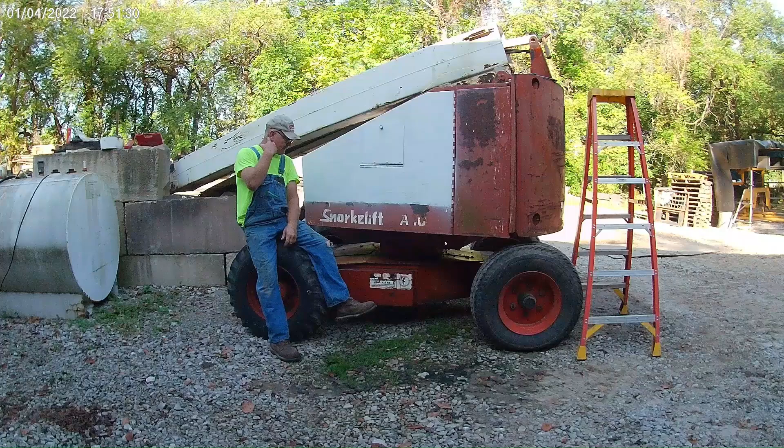We've got two problems with it. The cylinder that's inside of this boom that extends in and out is leaking oil, and the one on the end that tips the basket is leaking oil.

There's 3 sections of boom, 2 of them that scope out of the third one, and it has extend and retract cables that have to come out, and the first and the second boom have to come out of the third boom to get to the cylinder, to get it out of there and get it apart.

So the first thing we did was we took the basket off, because we don't want to have to deal with all the weight of the basket and everything else. So we took the basket off. That was the first thing we did.

Undid the wiring to the pedal. We took the dash panel completely off and set it on the ground so we didn't have to unwire anything, and then we just took the basket off.

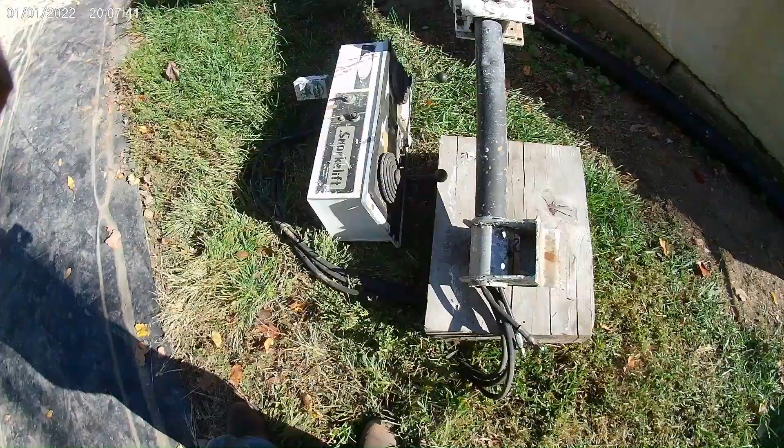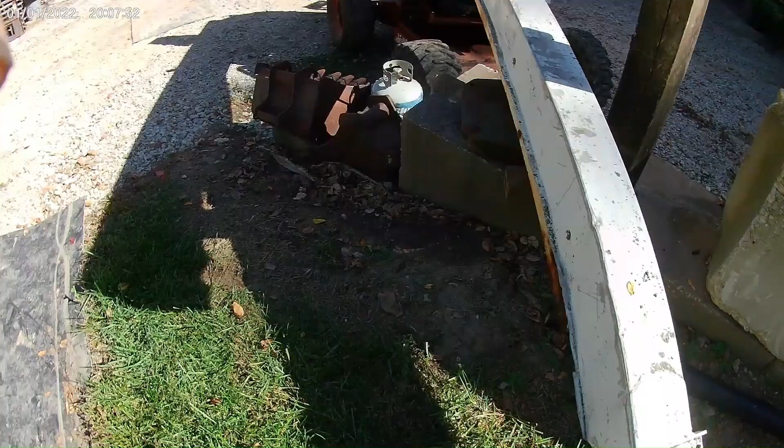So we laid the basket on the ground and we disconnected the train track from the side of the boom all the way up to the back of the boom, and just lay it off on the side of the machine so I didn't have to deal with any of that.

I think it's going to make it a lot easier with this all laying on the ground.

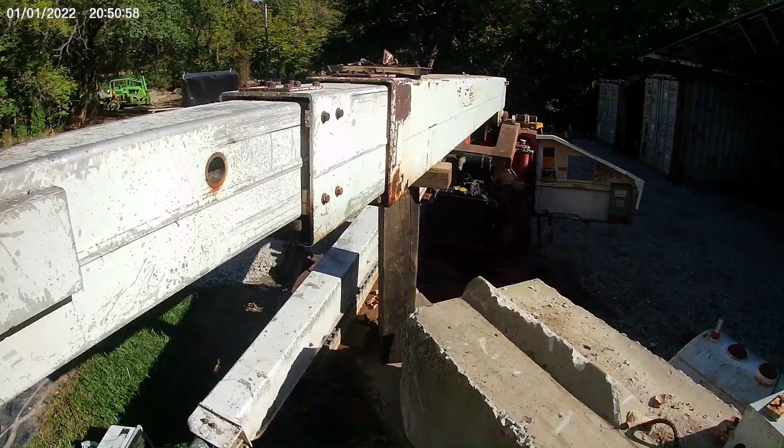So we took the butt section and we took the wear pads out and we labeled them, which one goes where. The one on the bottom, we've got all the bolts out of it.

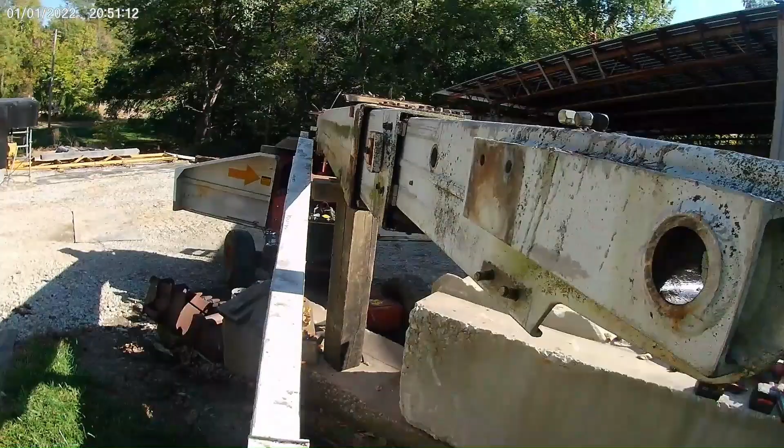And we've got the boom at a level position so we can slide this section, both sections, out at the same time.

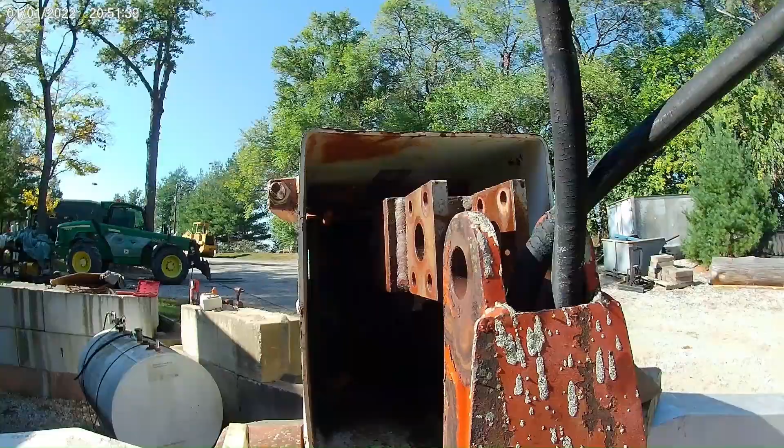So we've got our controls here laying on the ground. We've got our extend cables. We've got to take the extend cables now and take them and tie them to the cylinder on the inside.

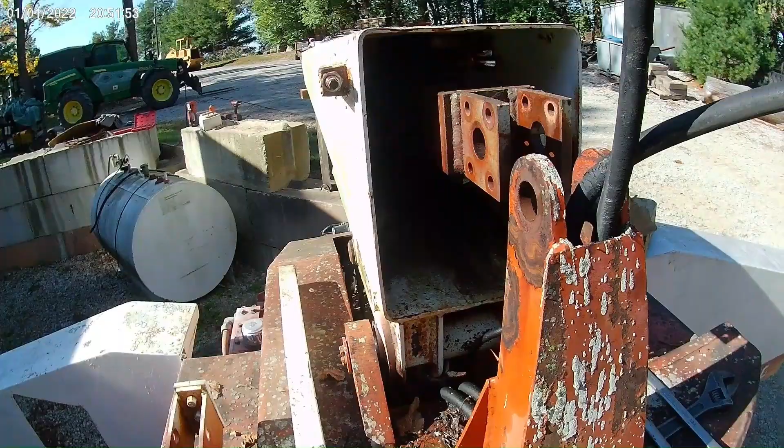We took this whole mechanism off. I thought it would just be easier to take the whole thing off. So I took the whole thing off of there, and now I'm going to go after these extend cables and get them off and tie them to the end of that cylinder, and hopefully I can just pull the whole thing out of this last section of boom. That's what I'm hoping for.

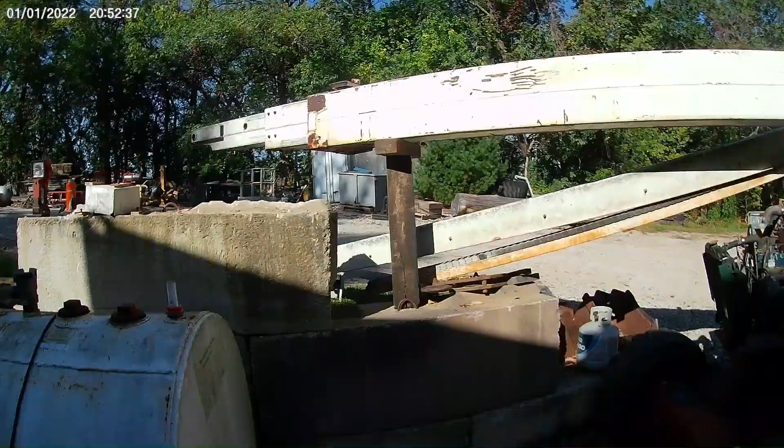Take the retract cables here and take them loose and let them hang, and as the boom comes out, the cables are going to get longer, so we'll have to pull down on these cables as the boom comes out.

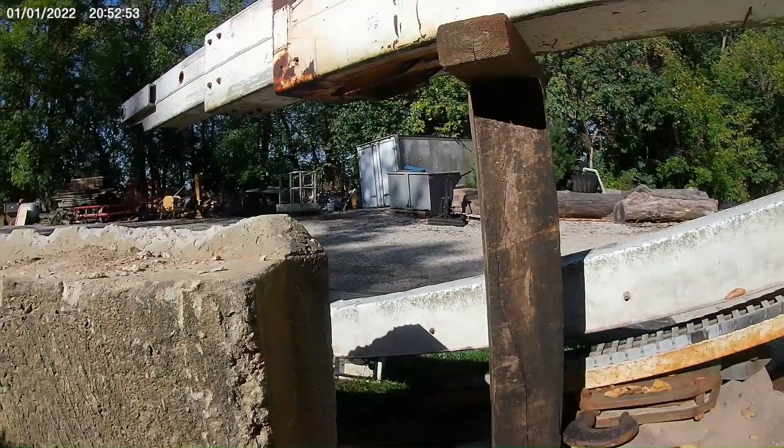So here's my retract cables. I've got them loose and hanging down, and I've put a choker right here around the boom, and I'm going to pull it out a little bit at a time. It's just me, so I'm going to have to pull it out a little bit and then pull down on these and keep those cables coming out.

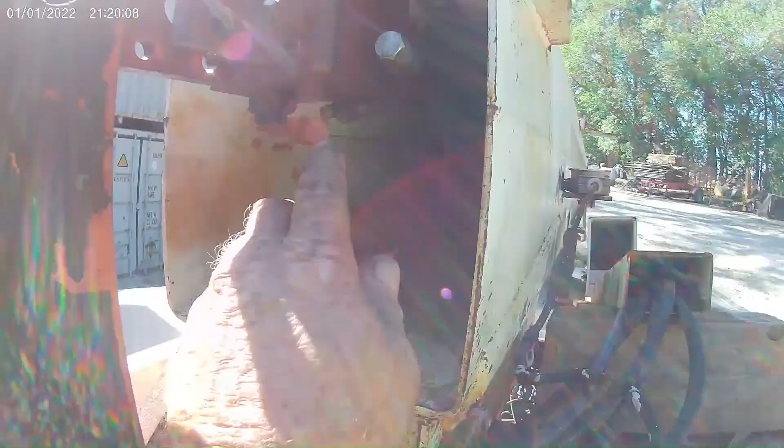And then back here in the back, the retract cables, you can see them right here. I've got them tied to the cylinder rod. So when I pull that, it's going to stay right there on that cylinder rod. I got 4 tie straps around there holding it, so surely if a couple of them break even, the other ones will hold it.

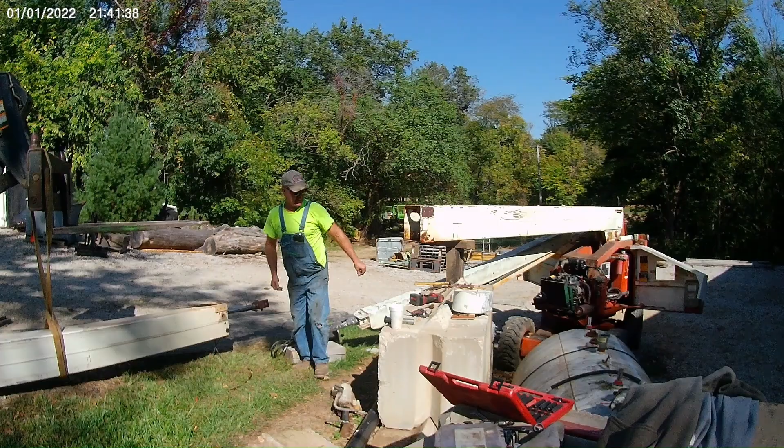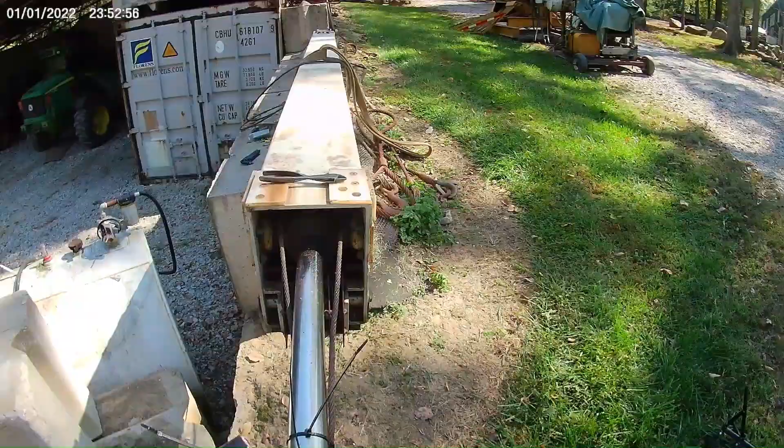So now that we've got the boom out of the thing, cut these ties off, and I'm going to try to remove the head gland and pull the rod out right here and just leave the rest of it in there if I can. That's what I'm going to try to do.

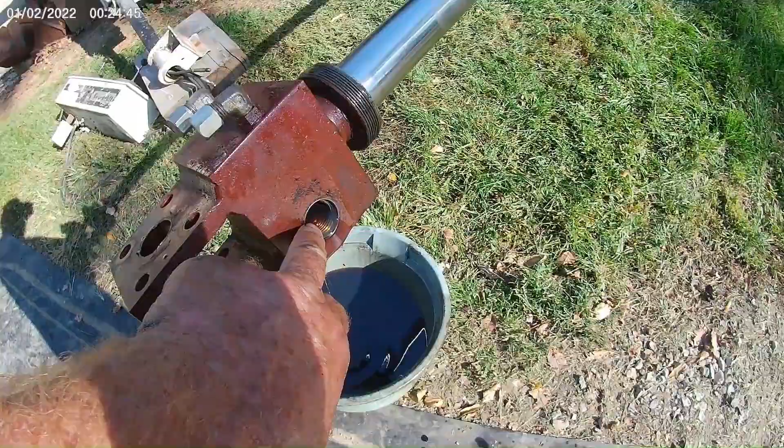So there's two load hold valves. One goes on this side, one goes on this side. This is what they look like right here.

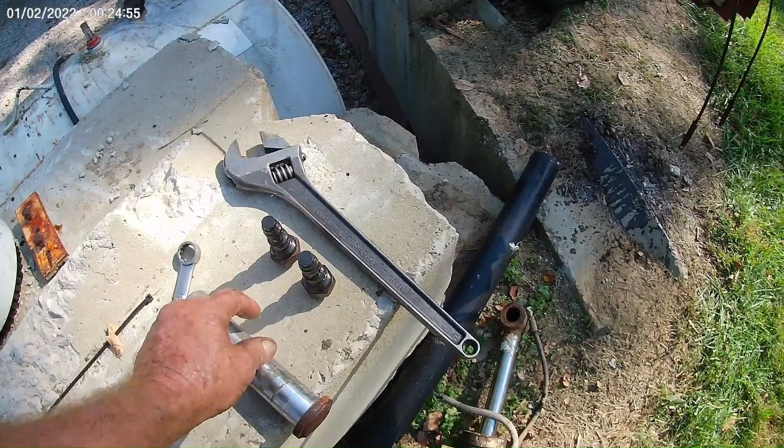You got to take the load hold valves out before you try to move the cylinder, otherwise it won't move.

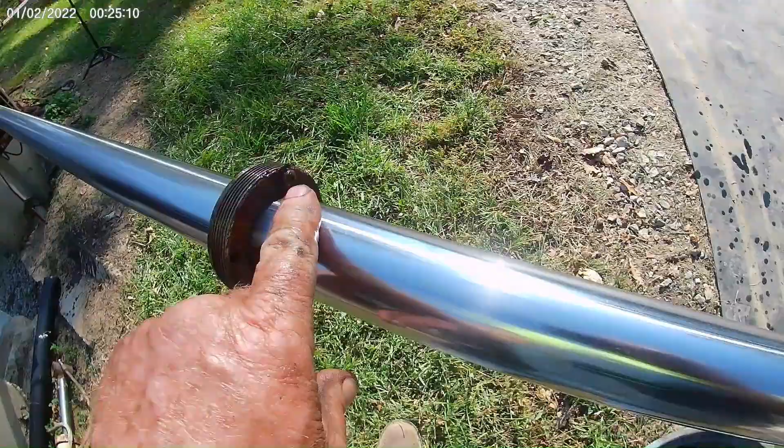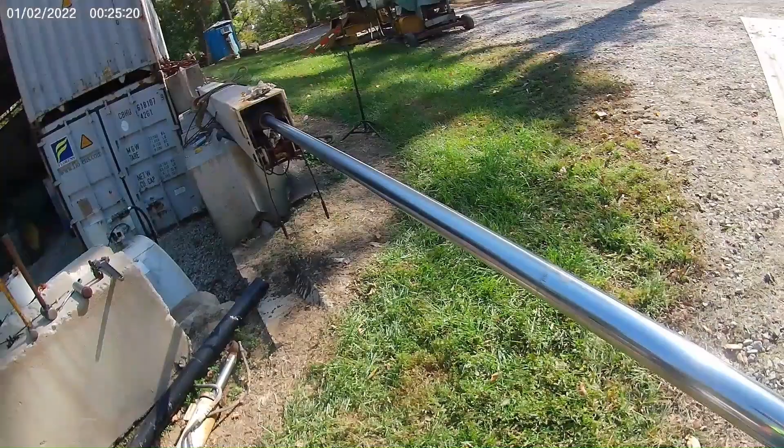Holding the head gland in here was a little set screw. Took it out. Head gland came off pretty easy. I'm draining the oil out of it now. I give her a little slight tug and it's getting ready to knock the packing right out of the front of it. So once I get it out, I'll take it and lay it up on top of this boom here where I can work on it.

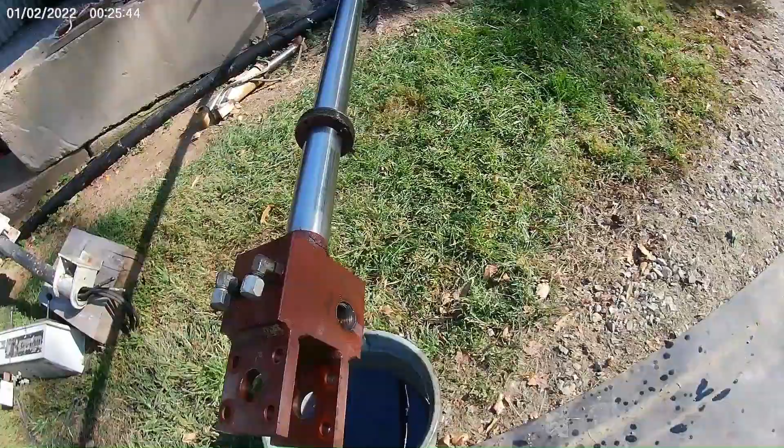Interesting way that they built this cylinder where all the oil comes in the head end of it. Pretty interesting.

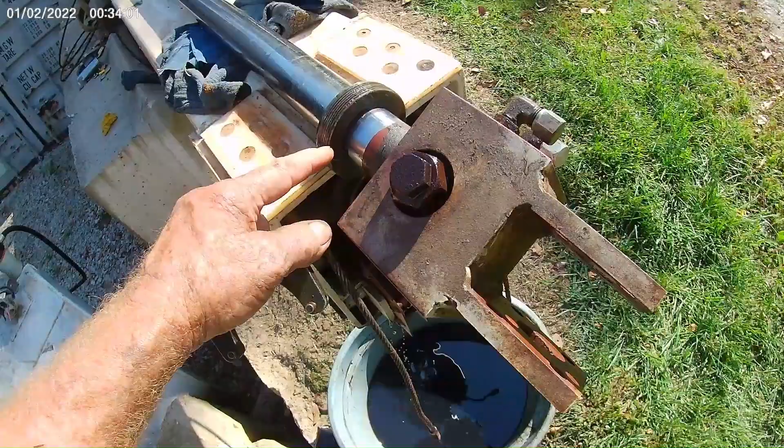So to get the head gland out, we use this small little adjustable spanner wrench, and it was on there fairly snug. I put a little pressure on it and then I put a brass drift on the top and give her a couple of taps, and it took right off.

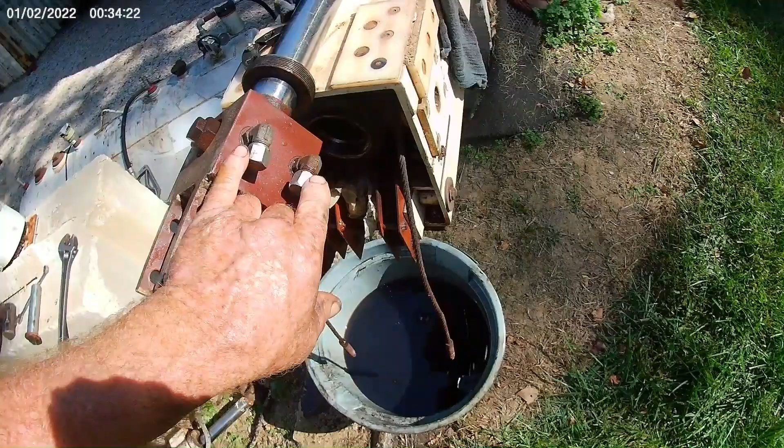Extend and retract. I was going to show you how that worked.

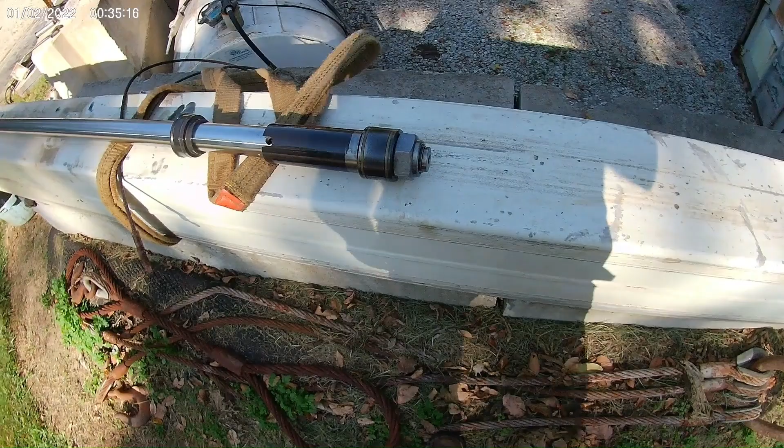So when the cylinder is all the way out and your head gland is down here touching, oil comes through this hole, pushes the cylinder back together, retracting. This little hole in the end right here, oil would come down all the way down through the center of it. There's like a pipe all the way down through the center of it where the oil can come out here and extend the cylinder.

So it's kind of interesting how it works.

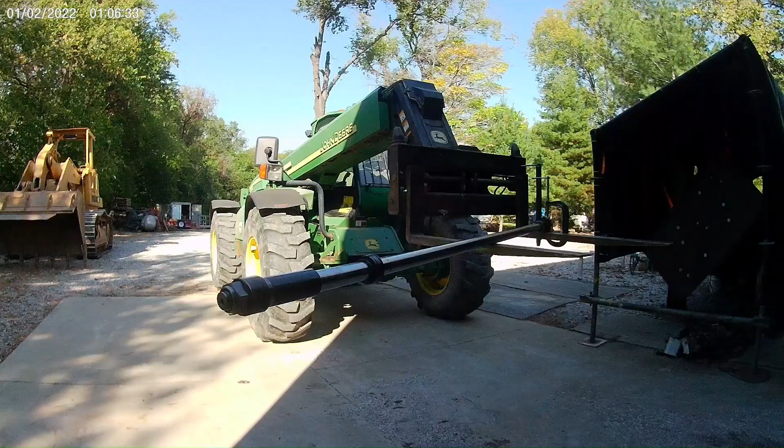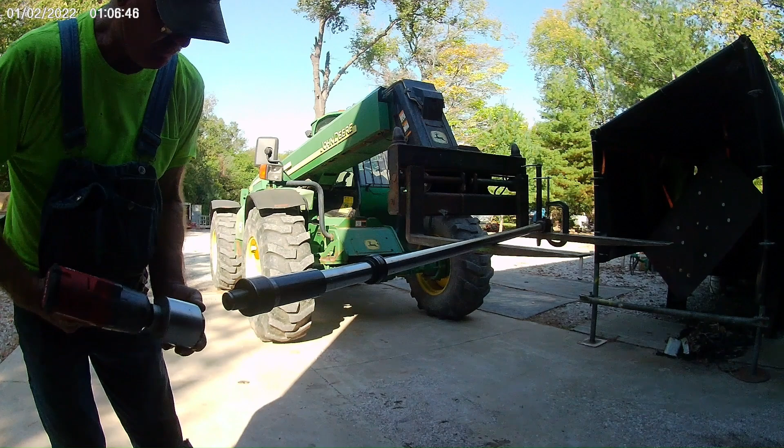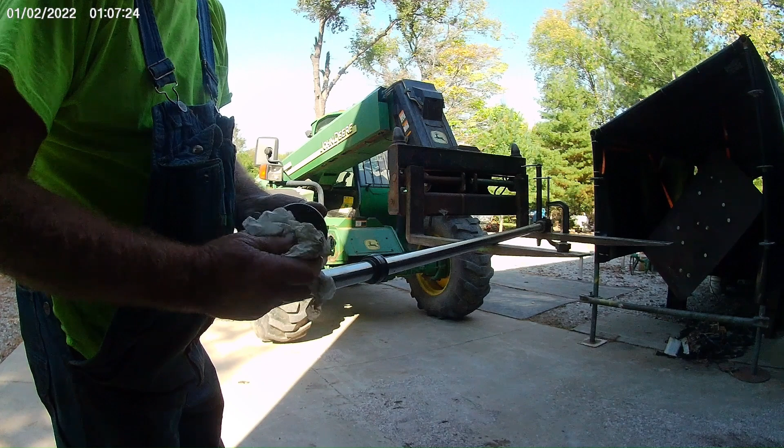There's your piston. A little O-ring behind it, right there. There's your sleeve.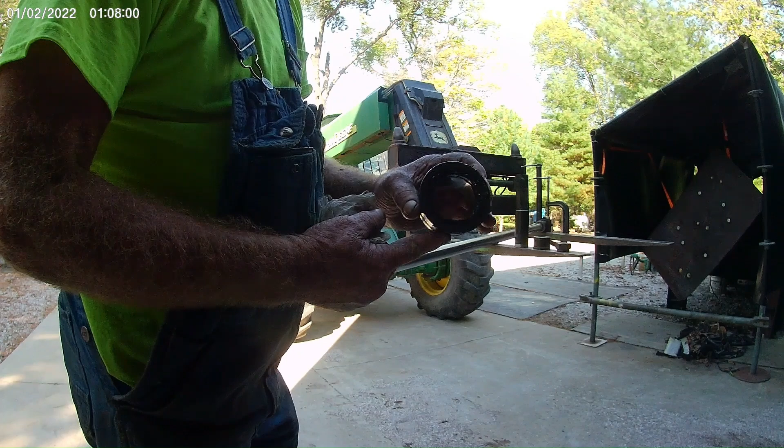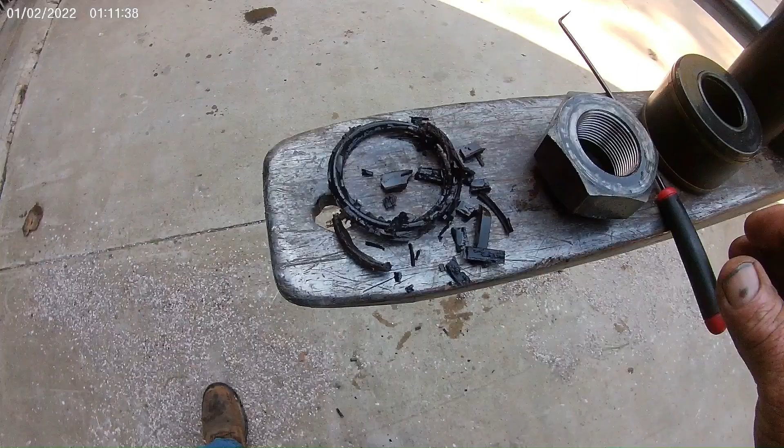And there's what's left of a U-cup. Wow, wow, wow, wow. Boy, that's bad. Man, oh man. Now I just have to show you what's left of that U-cup. Think I got my money's worth out of that one, don't you? That is bad, bad, bad, bad, bad. I'm surprised the oil wasn't pouring out.

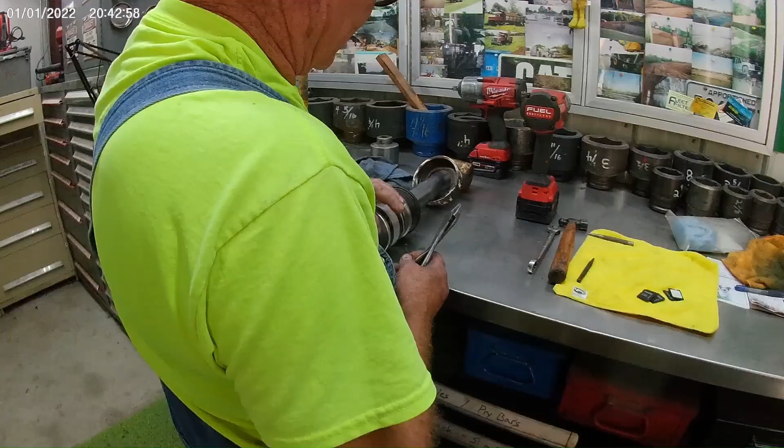So I just pulled the cotter key out of this thing. There's a cotter key hole, goes right through this rod right there. One side was already broke off, and the other side, all I did was barely touch it and it broke off.

Always use a new cotter key. If this cotter key would have broken off inside of this cylinder with this thing running, dancing around in here, it would have scarred up and ruined the cylinder from the inside out. And chances are it might even have went back to the valve body and screwed the valve body up. You don't know, but for what a cotter key costs, put in a new cotter key. Don't ever reuse a cotter key. Throw them away, put in a new one.

Just good practice. I take this self-lock off, and that wasn't bad. Pull that piston off of there. O-ring behind the piston.

See where it fits in that little groove right there. So you got 2 piston seals, O-ring in the groove, head gland. Pull the head gland off. There's a backup ring and an O-ring here. There's a U-cup and a wiper. Real simple. Real simple.

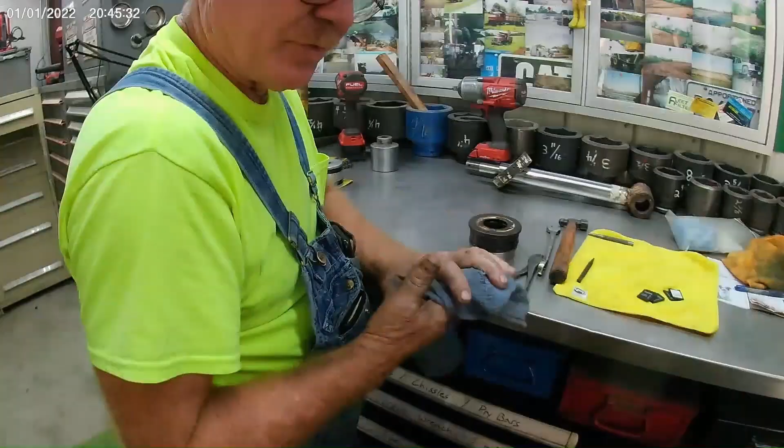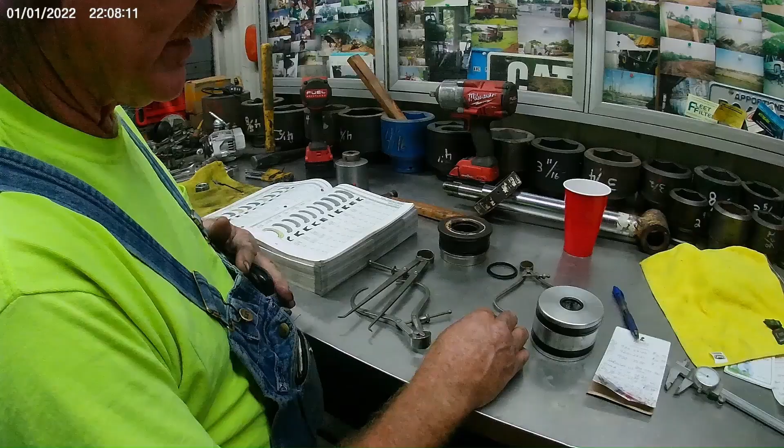So for those of you who need to order seals online, which is what I do, it's really easy to measure. What we're going to do here is we're going to measure this where the U-cup sits. Here's your U-cup, I just took it out. A lot of times you can look, if the U-cup is not ate up, there will be numbers on the back of it, and you can take the numbers right off the back of it and go match them up. But usually they're so deteriorated that you can't get a number off the back of it. So I'm going to show you how I do this here real quick.

So once the U-cup comes out, you're going to find out what is the size of the rod. So the rod is 1.750, that's 1 3/4 inches. Jot that down on a piece of paper. 1 3/4 inch rod. I like the ID, the OD, and the height. So the inside diameter is 1 3/4 inches.

The outside diameter of the U-cup, we're going to go in here with a pair of calipers. We're going to stick them down in the U-cup groove, and we're going to crank them around until they fit tight, but not too tight, just enough where you can move them. We'll pull them out, put our caliper on there, and find out what that dimension is. That is 2.115. So that's just a little bit shy of being 2 1/8. So we'll write that down. Outside diameter is 2 1/8.

The height, put our caliper back on our U-cup, and we're going to find out that our height of our U-cup is .375, that's 3/8 of an inch. So the height is 3/8.

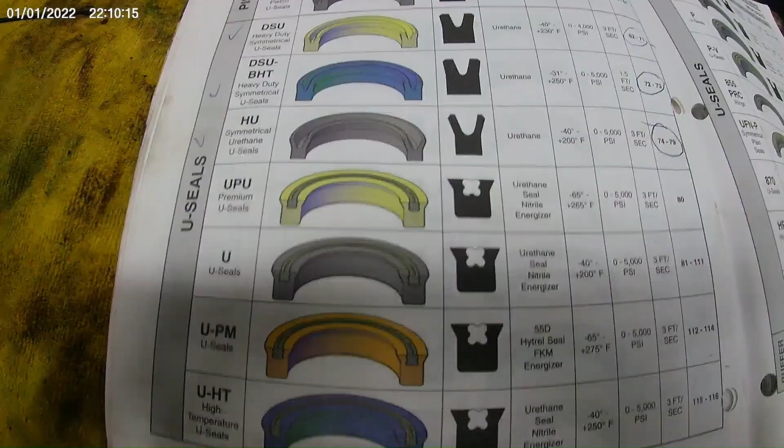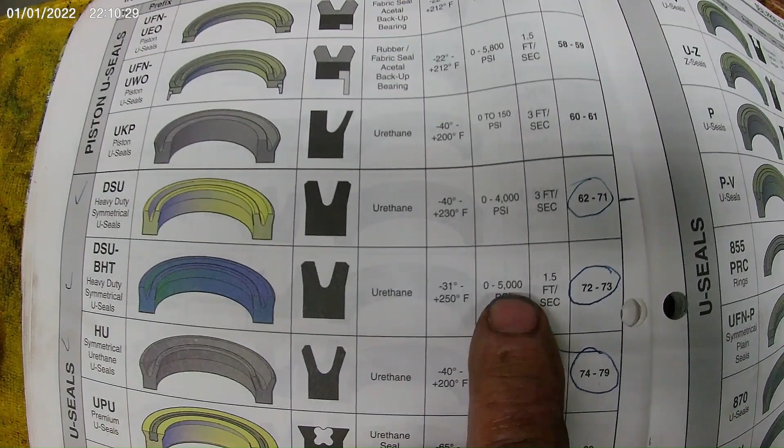We're going to go to our book. Let me get this camera over here so you can see this really good. Look here, what I like to use, this one here is rated for 1.5 feet per second, 3 feet per second, 4,000 psi, 5,000 psi, working temperature, urethane. So you pick whatever you're working on to match up with what you've got going on right now.

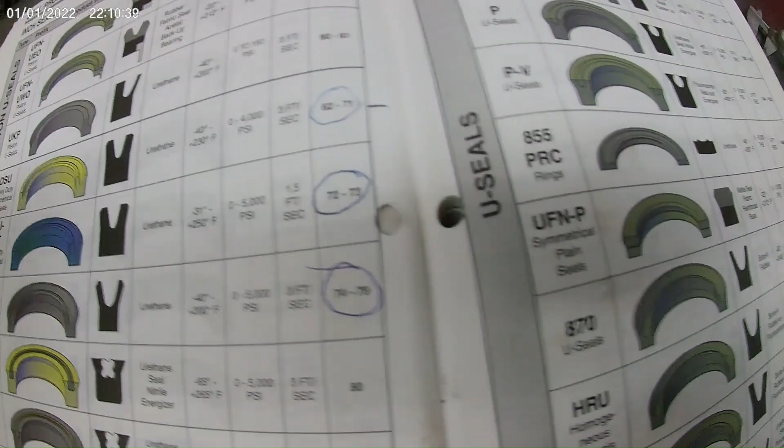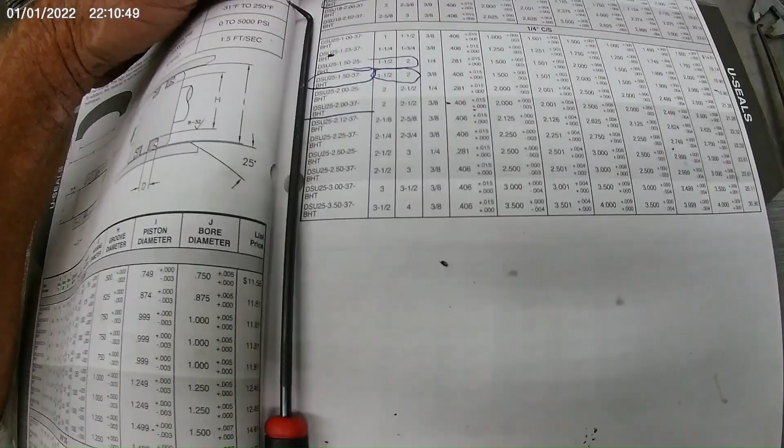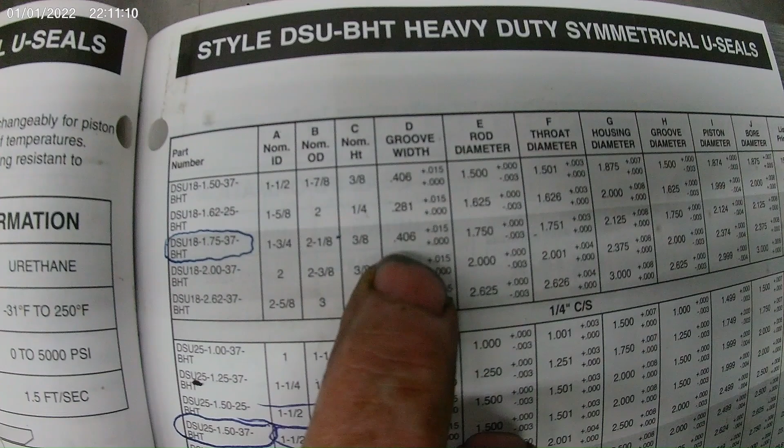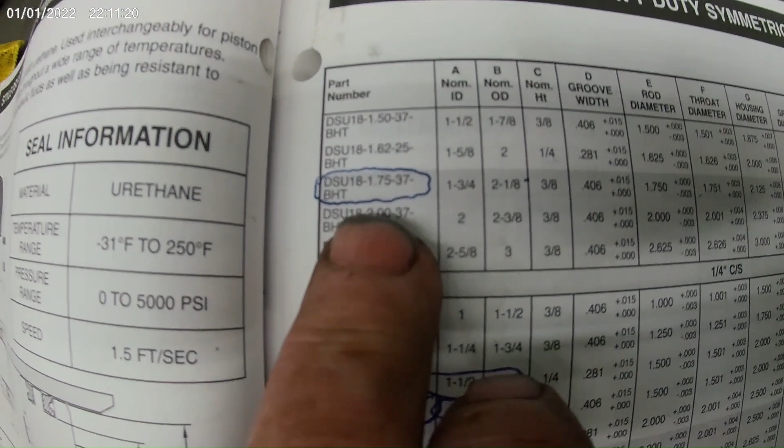So right there it tells me page 73. I'm going to go over here to page 73, and I'm going to scroll down here, and I'm going to start looking. When you look right here, it's going to show you inside diameter 1 3/4 inches, nominal outside diameter 2 1/8, 3/8 of an inch thick. It tells you all these technicals that you can look up yourself and make sure that the rod diameter, the throat diameter, the housing diameter, all this matches up. It's going to give you a part number. Come across here, it's going to give you the cost of it.

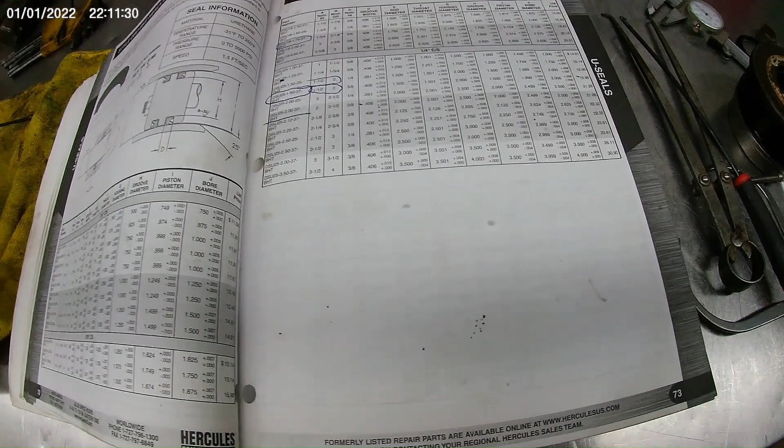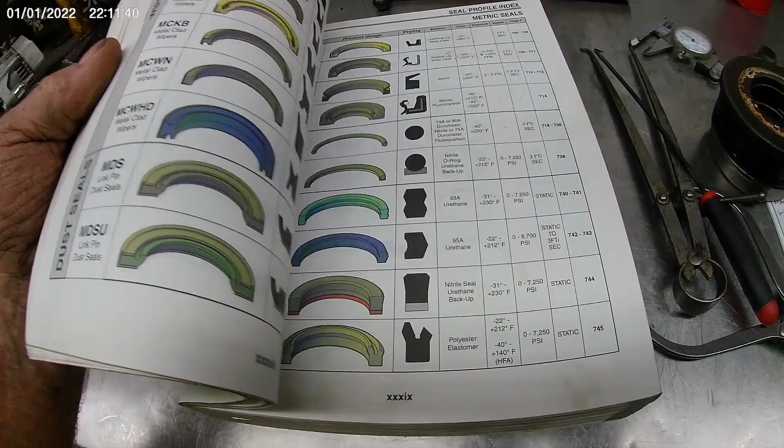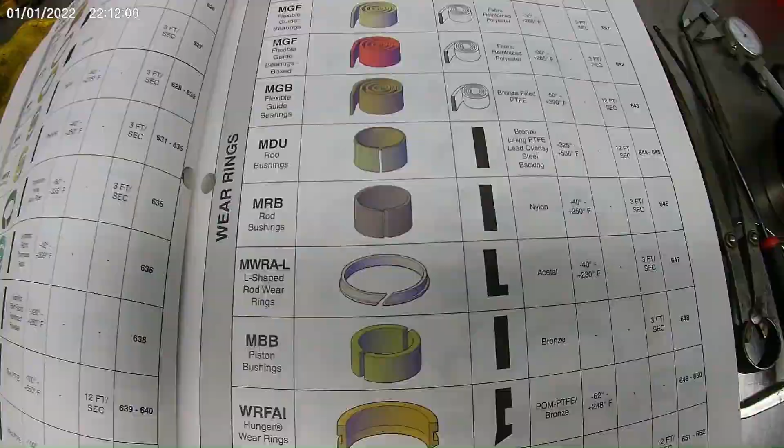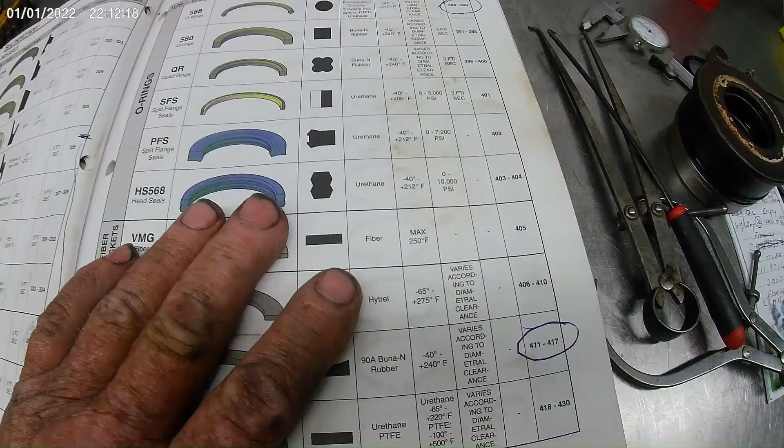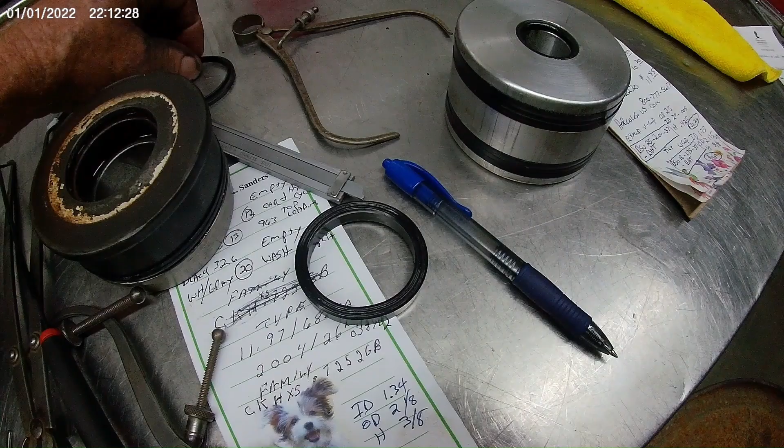We'll order up all those seals, and when we get the seals, we'll show you putting it all back together, and we'll show you putting the boom sections back in the machine. So thanks for watching, and hope you enjoyed the video.